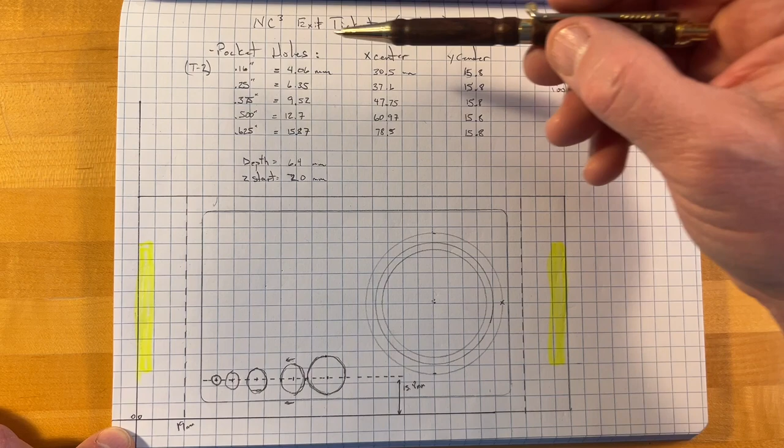Right here, however, we are going to set up our drilling profiles. We're going to still use tool 2. With our pocket holes, we've got now an X and Y center. Pardon my drawings for not being 100% accurate, but those will be the centers of where our drill or our pockets need to be. Now, as we set this up, I need to know what my diameter is.

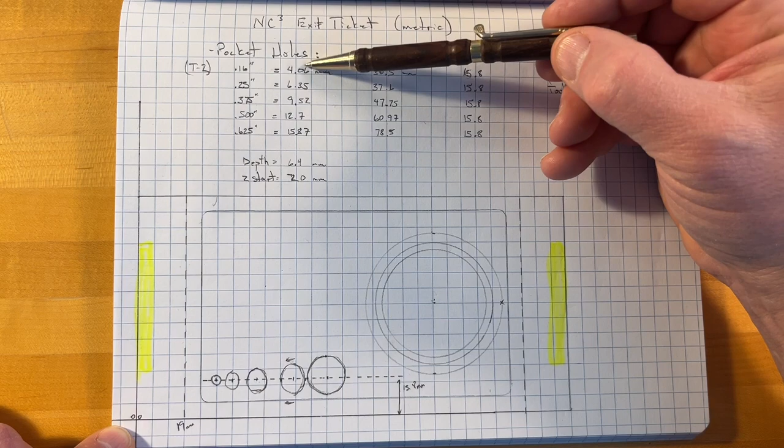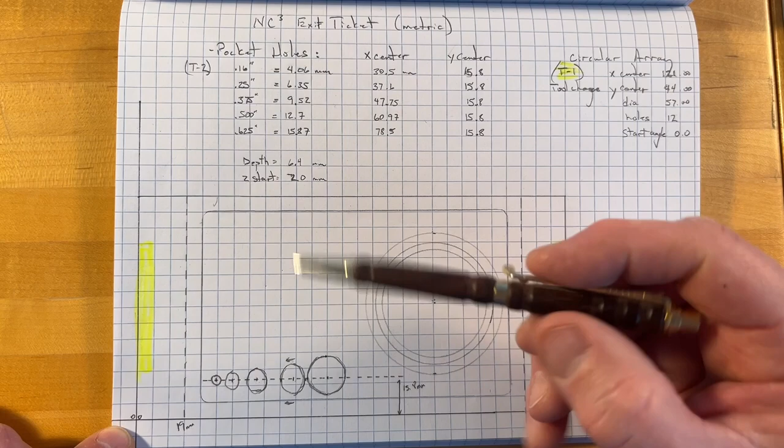So I've done all my conversions in terms of standard to metric. One of the first holes that we will do, or pocket number 1, will be 4.0, 6.3, 9.5, 12.7, and 15.8. Our depth, again, we've been at a 1 millimeter depth, and we're going to a total depth of 6.4. So with that set, we understand where we're at.

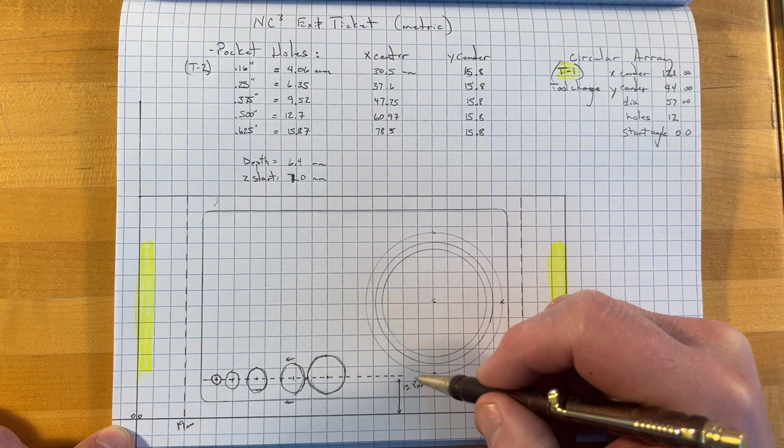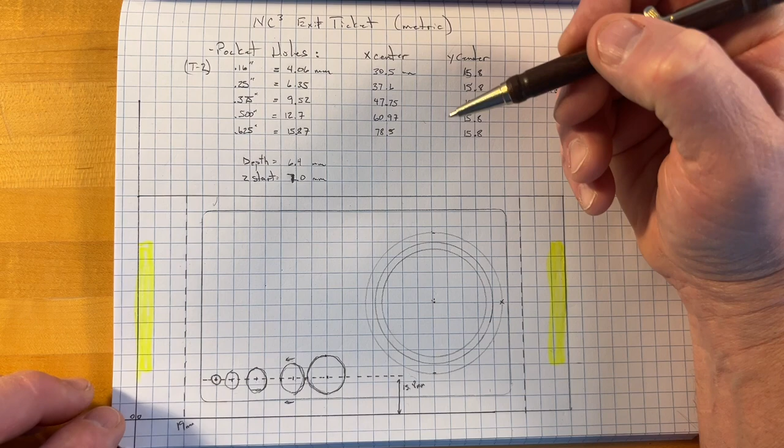We also need to look at what our X and Y centers are. So everything will be on a 15.8 Y center, and our X centers will be 30.5, 37, 47, 60, and 78. We'll punch those in so that we've got the accurate measurements as we do our pocket holes.

Let's go back over to conversational and enter that. Now, before we get started entering this in, I want you to see the end product, which is just a label here of the circular pocket holes, and this is circle 1.1.

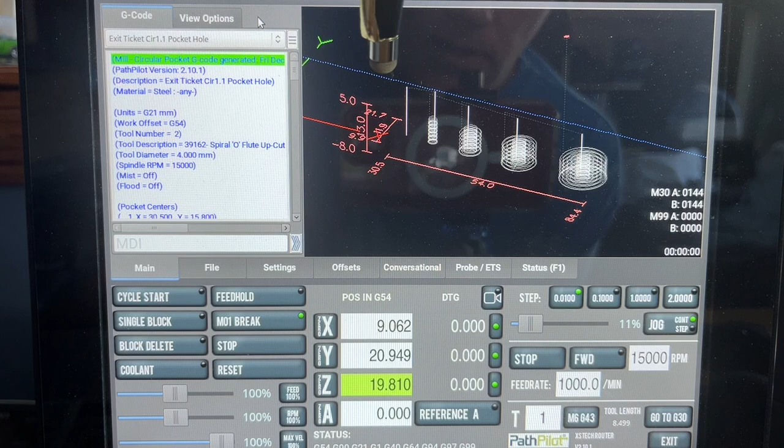That's actually this one right here. I'm going to click append to this, and I'm going to add each of these cut patterns to this one. That way it will then recognize that all of these cut patterns happen in one conversational piece.

So I'm going to go back to File. I'm going to go ahead and edit. And you can see here where all of my tickets are right here. Each one was done independently, but then it was appended or added to.

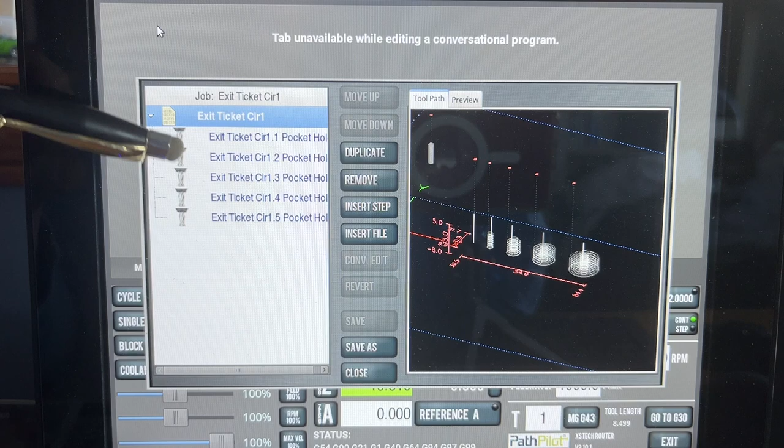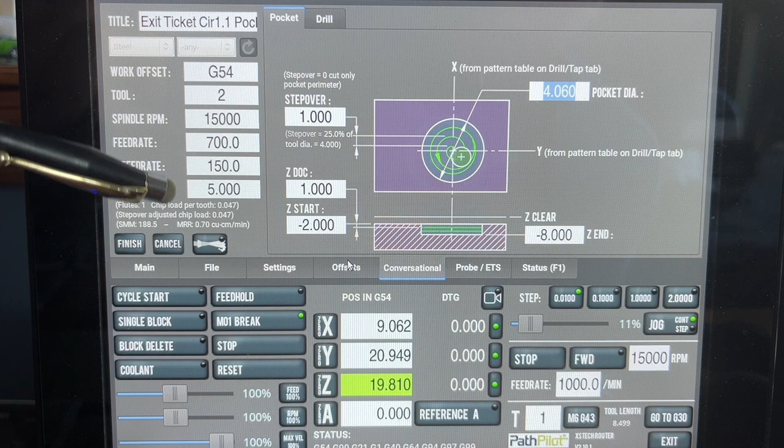So if I come in and I look at circle 1, I'm going to go ahead and do a conversational edit. Here are some of my statistics, if you will. Again, I'm going to keep all of this the same. I'm still using tool 2. I've got a step over of 1 millimeter. Just because these are holes, I can go a little bit faster.

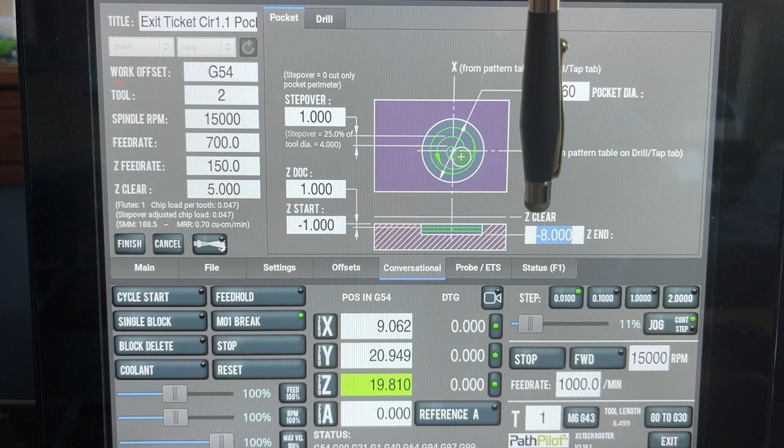I'm going to have a Z start, and I'm going to go ahead and correct that to a -1. I'm going to have a depth of -8. I want this to go down a little bit deeper, and I'm going to have different pocket diameters.

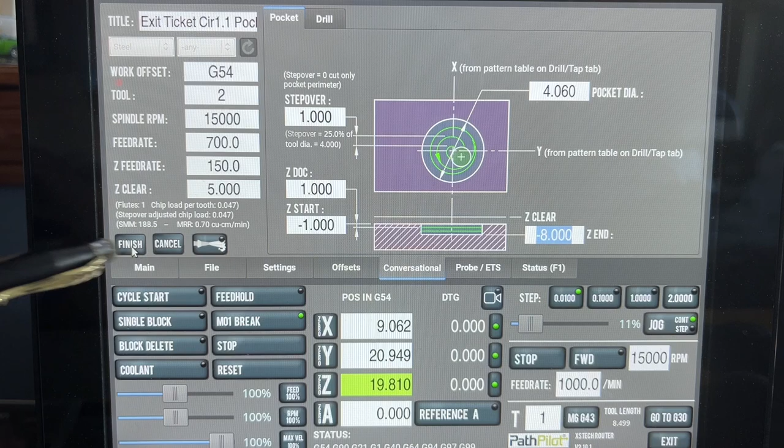So I'm going to have to change this one in terms of circle 1.1. If I go back and look at my notes, that is a 4.06. Each time I come in, I'm going to change this one, leave all of my other data the same, and then change my title, and then I will click on my append, which is down in my bottom window. That's how I will create all of these associated with the first one.

So let's go ahead and click Save because we made that adjustment, and we're going to go ahead and hit Close.